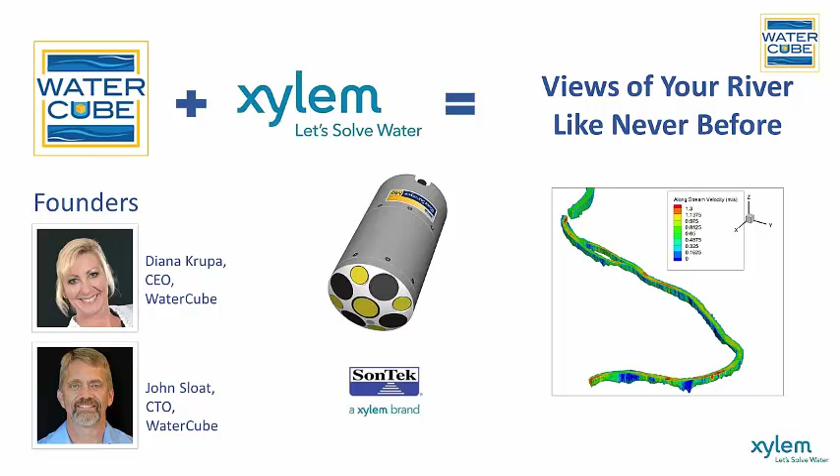And I thought I'd give a few introductory slides to just discuss what WaterCube is and why you would want to cube it. So WaterCube is a solution, really, to address the needs of the water resource industry and be able to provide a solution, a total workflow, which enables customers to have an aggregation of their data on the water using multiple instruments and utilizing a big data processing engine such that it is processing and analyzing vast amounts of river reservoir data, and then software on the back end to visualize and manage that data for comparative analysis, for validating and measuring your progress.

So this is something that we can do within days of data collection. No longer do you have to wait for a DEM to be created or to utilize MATLAB or ArcGIS or separate software applications. You can now process very quickly, create spatial views, and have your data within days.

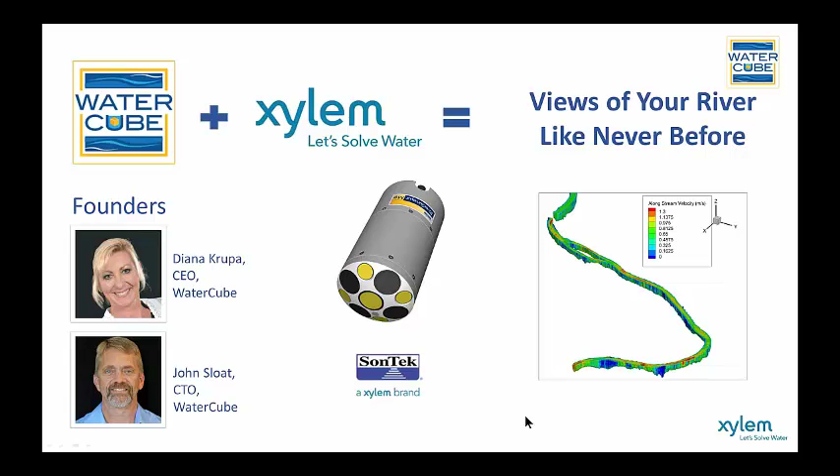And the applications are really quite vast. Today we're going to be focusing on velocity indexing and site selection and calibration with Art Smith. But we're also going to talk a little bit when we start looking at this data about the power of spatial data and what it can truly provide for certain applications, whether you're looking at stream power for hydropower applications, flow and quality monitoring, site selection, river restoration, even doing bathymetric studies in reservoirs and sediment buildup studies, habitat studies as well for your environment.

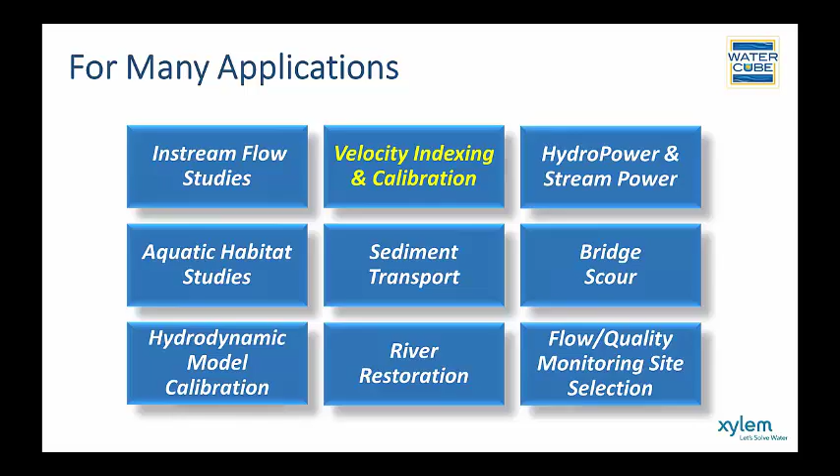And another thing that's quite unique with our Cubeit software is the ability to do model calibration for your numeric and hydrodynamic models and compare real spatial data to your numerical models and to calibrate them more effectively.

So technology has come quite a long way, and that's what's really enabled us to bring this solution to the market. So, in the 90s, there was the ability to get out on water and collect information through a single frequency Doppler ADCP. And then into the 2000s, the invention of a multi-platform integrated ADCP was a vast improvement and enabled everything to be within one system, giving you coordinate systems and the information you needed.

And today, we're able to put multiple systems on the water. Not just one, but multiple can be used, and then we can aggregate this from multiple ADCPs, as many as you wish to put out there, and collect that, pull it together, and process it very rapidly so that you can visualize your river like never before.

So with all this technology, of course, there are still challenges. And so for looking at how you want to solve the objective at hand, there is a lot of technology that still has to come together, be applied to the water, and a methodology for the data collection. And so Nick will walk us through that in a moment on how they did this particular survey on the River Severn.

But there still are some challenges with getting the data, making sure it is quality data, and processing that with multiple instruments, inclusive potentially of LiDAR. And then there's no immediate way to see those results and visualize the river to understand the impact that you may have. And so the back end of our workflow is really giving you that ability to visualize and see your river and what is changing and actually what's impacting your river over time.

So this is where WaterCube actually comes in. We provide a complete workflow for advanced data collection utilizing the latest acquisition technology on the market, aggregating that together to produce very quick results, and then taking that into state-of-the-art visualization software, our Cubeit software, for managing and visualizing that data. And so I'm going to hand it over to Nick so that he can talk about how they cubed the River Severn. Thanks, Diana.

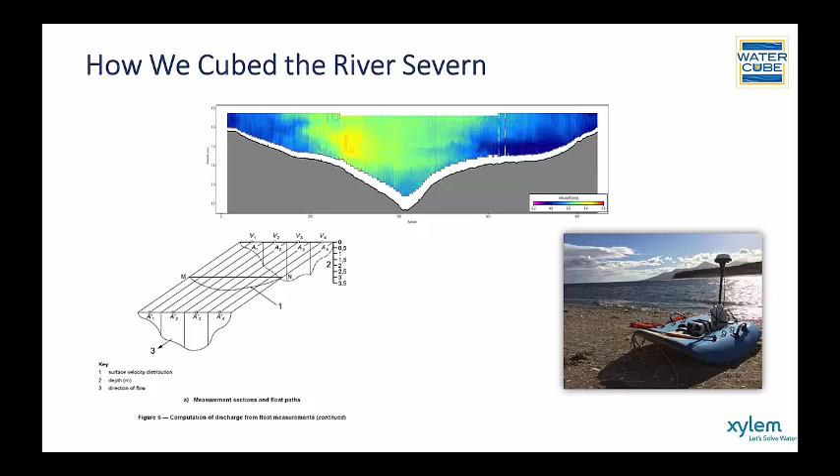And if we look at the next slide, more detail how we put it all together. So if you could go to the next one. Do you have it up now?

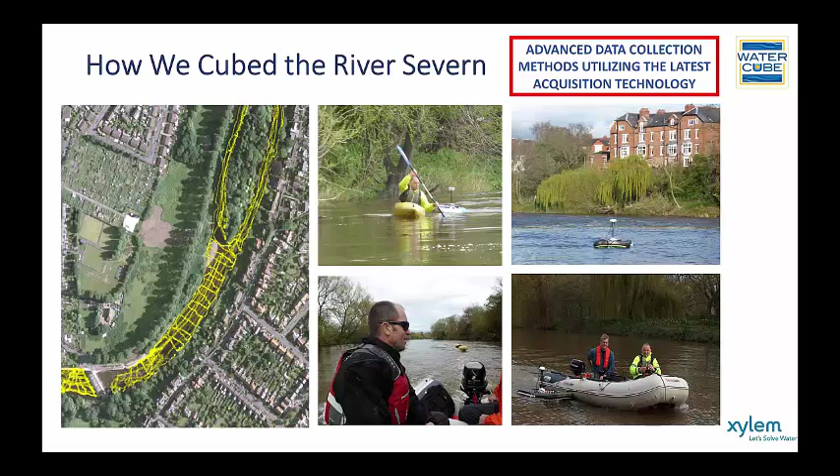There we go. So on the left is the depth sounding from each of the 5. In other cases, we've used a rope from shore to shore above the weir to make it as safe as we could. We've used the power boat as well. And we've also used remote control boats. So 3 of us out here at the same time collecting data simultaneously and then bring them back together.

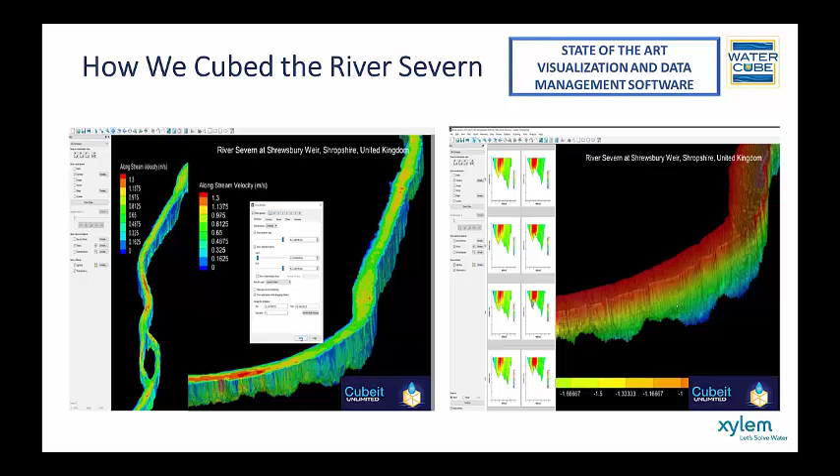So WaterCube, what we did then is we took all of this data that we collected within 4 to 5 hours one day, and we did it on 2 separate events, and we brought it into WaterCube. And this is a picture here of not only the depth but the velocity in 3D as we put it together. So this is bringing all that data back from the M9s and putting it into one package so you can visualize it. And so now I'm going to hand over to Professor Art Schmidt of the University of Illinois, who's been helping out with WaterCube, and he's going to tell you more about what we can see with this data that we went out and collected. Over to you, Art.

Thank you, Nick. My name is Art Schmidt. I'm, as Nick said, a professor at the University of Illinois, Urbana-Champaign, Illinois. And I have been working with river measurements, flow measurements, hydroacoustics for about 3 decades now. And a while back, talking with, in particular, John Sloat from WaterCube, he mentioned some of what they're doing, and I got rather excited about some of the possibilities.

And so today I'm going to show some things in WaterCube and some of the things that can be done with this ability now to visualize what's happening inside an entire reach of a river. So the figure I have up here now is inside the WaterCube software. And this one, we've coupled the along stream velocities.

The higher velocities are in red, lower velocities are in blue, for this entire 4-kilometer reach of the river near Shrewsbury. And then we also have LiDAR data coupled with this. So from the LiDAR data, you can see some of the features of the floodplain, the area around the river, the roads and so forth, the bridge here leading to the river.

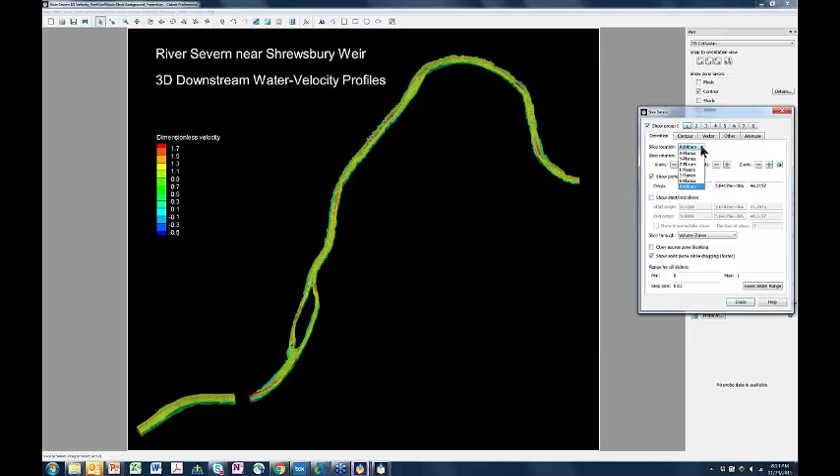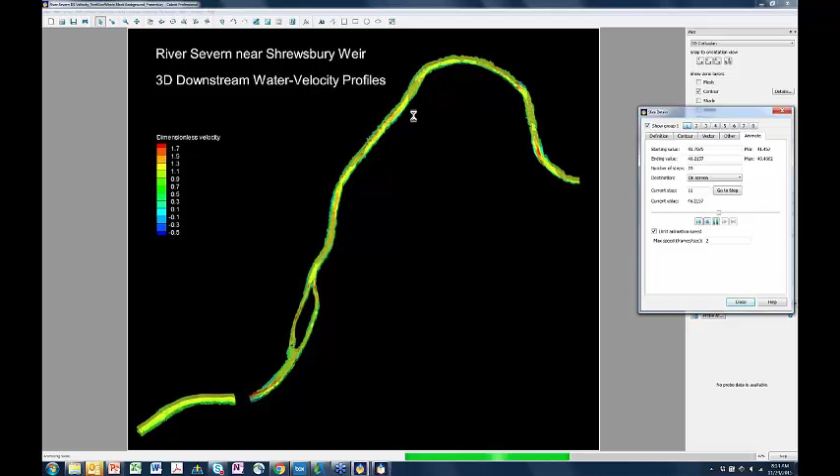I'm going to go to a horizontal plane here. And I will start with an animation. We will just start from a little bit below the stream bed and let the slices move up. And so you'll see it starts to fill in up here the deeper holes, but we're not to where there's water everywhere. Now we're getting the entire stream. And so we're looking at the slices as we move from the bottom up.

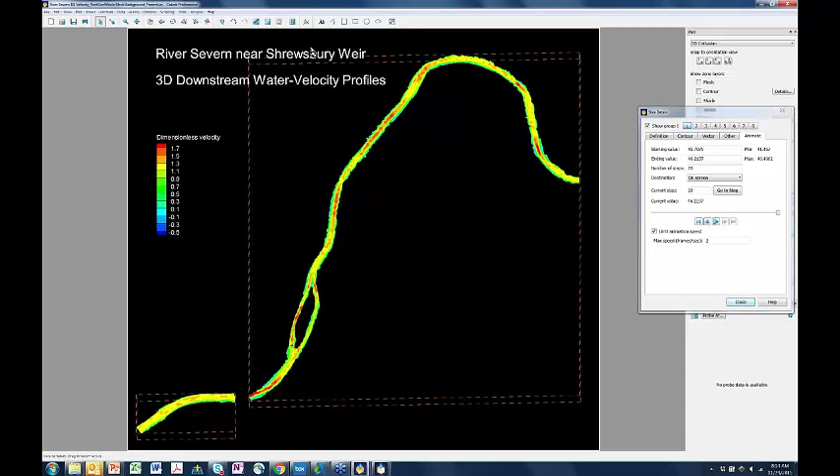To make it a little bit more plain, I will shut off the contour map here. Let me get rid of this bounding box, shut off the contour map, and go through our horizontal slices again. So what I want to illustrate here is the ability I can look at different parts, different levels, different vertical slices in my river.

So for example, if I'm interested in a fish habitat study, I might want to know what are the velocities some distance above the stream bed. Similar type of thing for scour, so it lets me look at this.

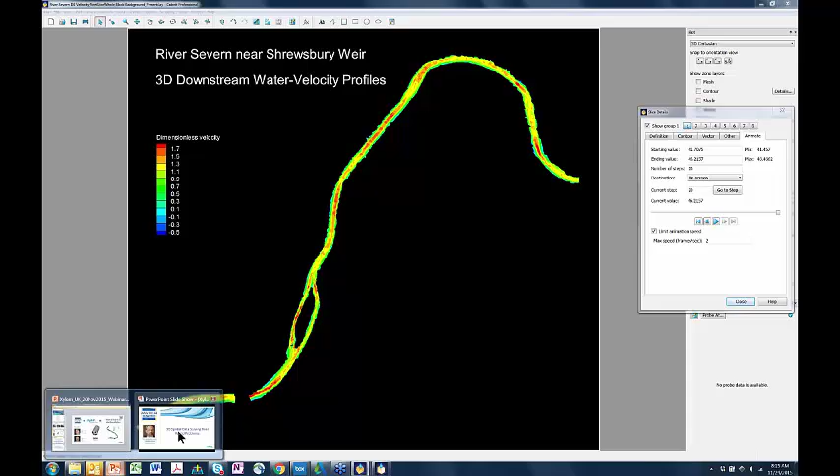What I'm going to do, though, for the most part today is talk about index velocity ratings, and I will use this as a case study as an example of what we could do with this. So we'll go back to the WaterCube software in a bit, but I want to give just a little bit of background for those who don't know index velocity ratings.

Index velocity ratings are widely used at places where we don't have a good stage discharge rating. So this could be somewhere where we have backwater from a reservoir downstream, or a larger river that's flooding, anything where we get backwater conditions. It can be someplace where we have variable gate settings that can control and affect the relation between stage and discharge. Tidal influences, even sometimes a lower gradient stream that's highly unsteady, we can need an index velocity rating.

So the basic idea is, instead of measuring the stage and estimating the discharge from the stage, we measure the stage, but we use a stage area relation determined by surveying the cross-section, and that will give us the area of the flow. We also put in an instrument that measures at some subsection of the flow, and we determine an index velocity rating, a relation between the mean velocity in the cross-section and the velocity we measure at this subsection of the stream. So then, by measuring an index velocity, we get a mean velocity in the cross-section.

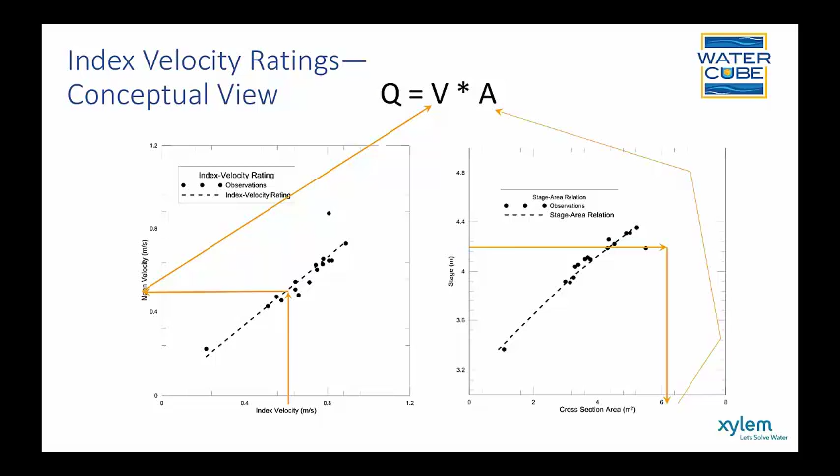So in velocity indexing, the fundamental assumption is that there's a very stable, well-defined relation between the velocity we're measuring in this index location and the mean velocity in the cross-section. If that holds, we get a good relation. If it doesn't hold, we're in trouble.

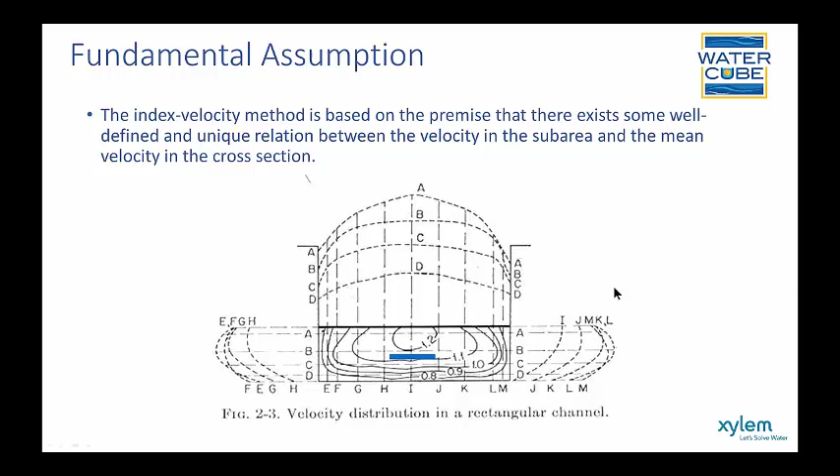But there's a lot of things that can affect this. Changes in flow conditions may change that velocity distribution. Changes in the geometry may do it. The distribution may change with time, things like scour, sediment buildup in the channel. Our velocity distribution can change with fluid conditions. Think of a tidal stream where I have a density gradient or a thermal gradient in the stream that can affect it. Or things like variable gate settings, and I'll show an example of this a little bit later.

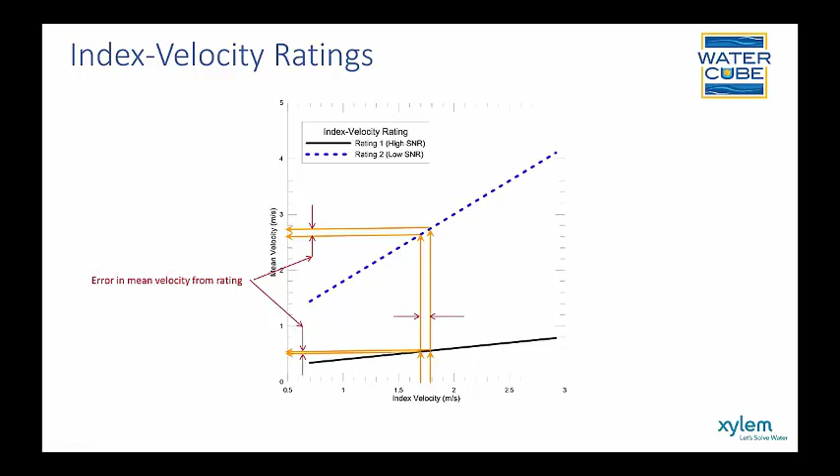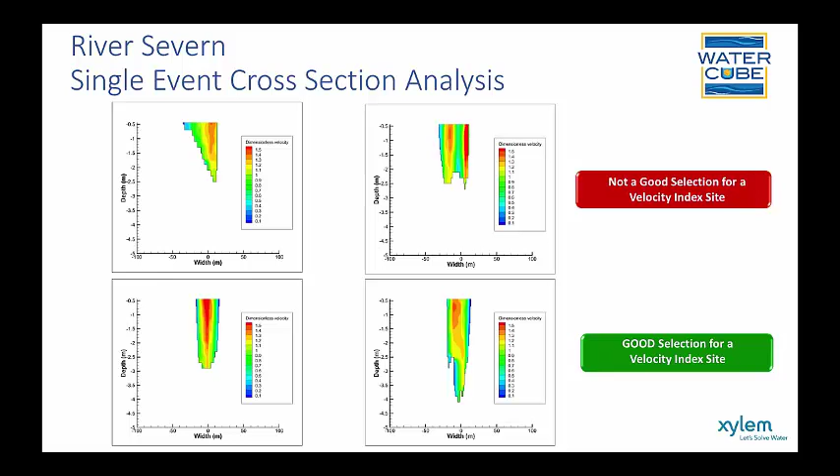And all this data here is from the WaterCube software, and this is from the Shrewsbury data that we collected. This is the Shrewsbury data you collected a while back, and then these are just some of the slices from the Shrewsbury site from WaterCube. This is one time down the river.

I'm now going to show results from a study done on the Snake River in Idaho. They had a velocity indexing site. In fact, I think it was near this first cross-section. And when they changed how they operated their 3 turbines, their index velocity rating went downhill very badly.

And so they went out, they did 4 measurements under 4 different conditions, different flow conditions, different seasons, different water elevations. And what I have here is 4 slices from the exact same site under those 4 different flow conditions. So you'll notice the very different dimensionless velocity patterns.

Clearly, as the flow conditions change, your center of maximum velocity is moving. So depending on where you're measuring, you're going to get a very dramatic change in that index velocity rating.

In contrast, from the same data, just a different location in the stream, we identified this site where you have a very consistent pattern of where the maximum velocity is, the lower velocities near the banks, and any real river will have some variability, but this site is going to tend to be very stable.

So if there's some concern about your site, doing multiple passes before you actually spend all the money to put the instrument in can be very valuable. So I want to show a little bit of this now in the Cubeit software. So what I have done here is I have zoomed in on that site where I said this would be a good one near Shrewsbury. And once again, I am going to pull up those slices.

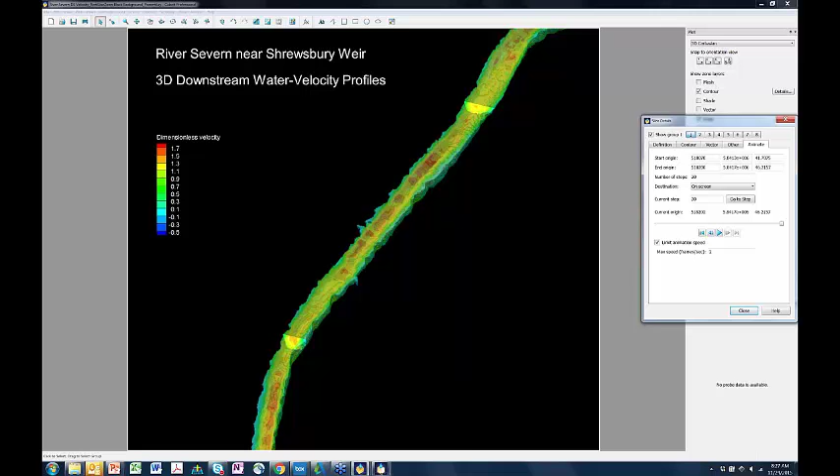So we can also, in the Cubeit software, these are all the dimensionless velocity slices from the upstream end all the way down the channel. So I just have all the slices pulled up side by side here.

And we can just start to look at these and look for what is going to be a good site, what might not be as good a site. Where are we getting that strong signal, more of the red? Where are we getting things that are well centered in the channel? You'll notice some of these are just sort of splotchy. It's not consistent as we move downstream. So for a very short area, we might have something good, but then we go a few meters downstream and

it started to change. So Art, just to confirm here, each of these vertical columns are discharge and measurements made on 4 separate events, 4 separate days. But no, I'm sorry. This is Shrewsbury. So this is one event. You're reading this just like a book. So this is a cross section. This is the next slice downstream, the next slice downstream, and so forth.

And in the software, you can pick what sort of spacing you want. I believe these were set up every 1 meter, but you can say every 1, every 5, every 10. And from all those data collected, the run of river and the transect type measurements merged together, the software puts together all these cross sections. So I'll scroll down a little further here.

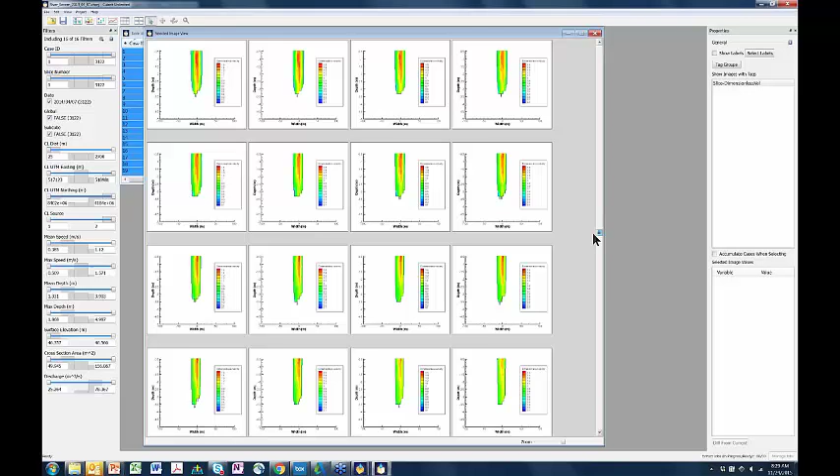And so my hydrologist can continue to look until we see some of those sites where this is now looking like a good velocity. I think these are some of the sites I pulled up. You can see I'm now a distance of about 1,160 meters downstream from my weir. I've got slice numbers. I have UTM coordinates. A mean speed here of 0.59, a maximum of about 0.98, a mean depth of about 2.5 meters with a maximum of 3.5.

So we have the data here. I can pick different sites and look and see what might be good. And so this is just illustrating how your hydrologist has more information to apply their expertise to where would be a good site for this. I'm going to now switch to the Snake River site.

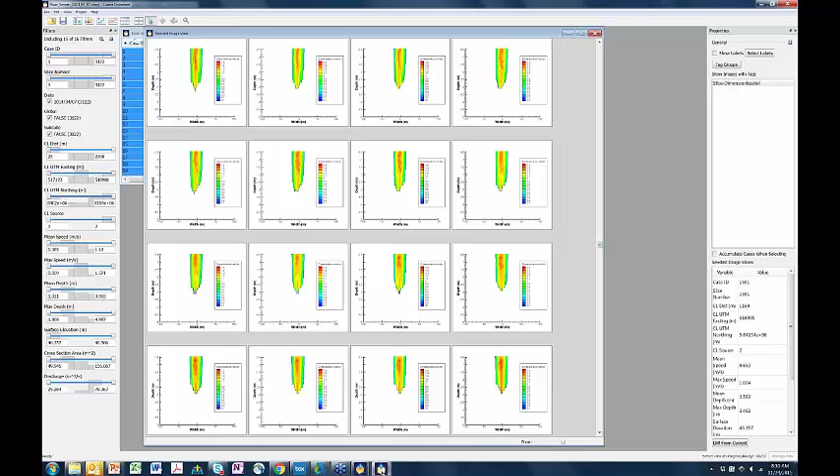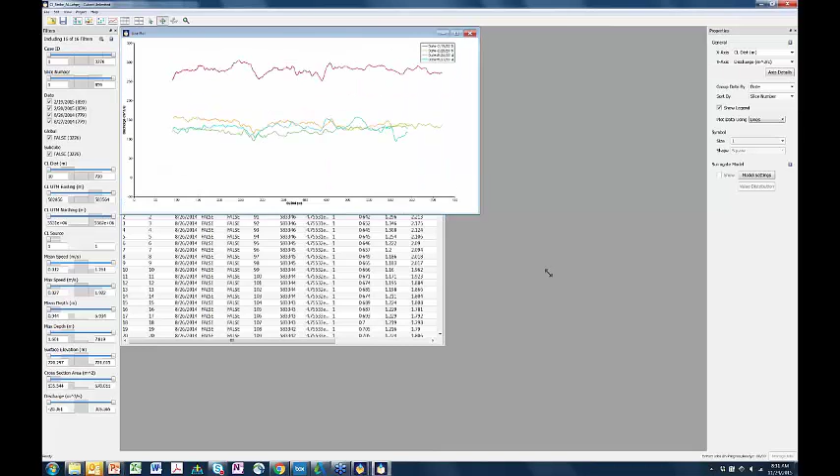And when we pull this up, you'll notice we have a table. We have data for every slice, so I can look at it in tabular form or a slice at a time. And I pulled this figure up at the top. What I'm showing here is the centerline distance and then the discharge determined from all these measurements as we move along the stream. And so you'll notice, again, 4 different dates, 2 in August of 2014, 1 in February 2014, 1 in February 2015, and very different flow conditions. We had 2 turbines running. These we had just 1 turbine running.

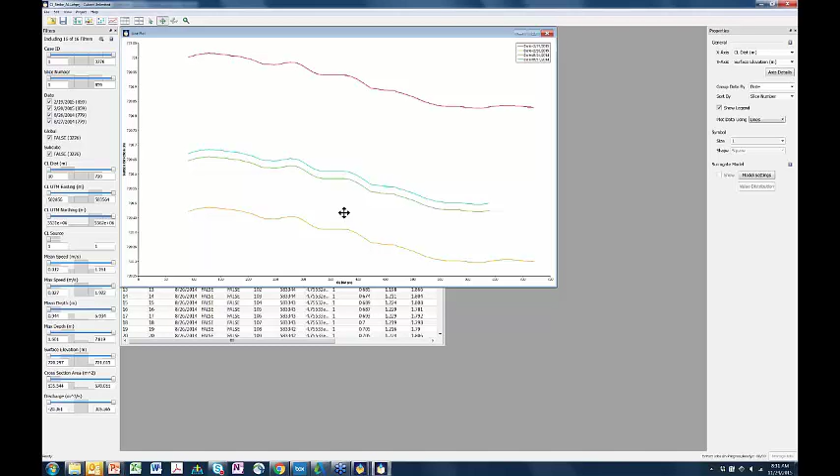I can also change my y-axis to the water surface elevation along the reach. So we're seeing here's our water surface slope, but you'll also notice that even the 3 at the same flow condition, we had a change in the water level. So we have a seasonal difference, August to February, different water elevations and different flows. I can then pull up this matrix view, and I want to make my columns, instead of slice number, the date.

So what I've just pulled up here, this is what you were thinking earlier, Nick: each column here is a different date. Each row is the same slice, the same cross-section location. So now I can look at my entire river. Here's some of the ones I showed before where you can see the velocity moving from the center out to the side. By the way, I should have pulled this up first. Let me give you an overview of where we're at.

So I'm going to move this a little bit. This is the LiDAR and the dimensionless velocities at the site. We have the dam and reservoir up here. Here's a spillway, which is not being used. In fact, it's very rarely used. Here's a powerhouse with 3 turbines. And then in the LiDAR, you can see a road coming down and then a bridge here. And near where this bridge is where the old velocity index site was.

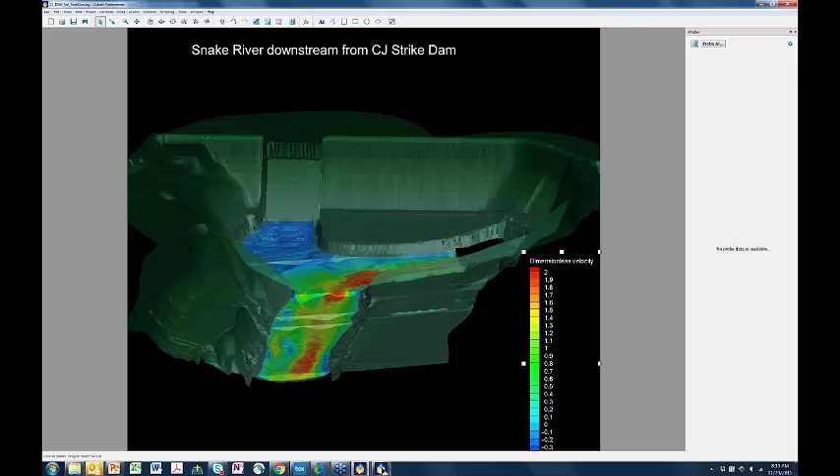And I showed a few slices, but what happens depending on which of the 3 turbines is being run, near the bridge, the maximum velocity moves from one bank to the other. And so that's why they were having the problems. So by looking at these data, again, you can see here the maximum velocity is near the right downstream bank. A different turbine running, it's more in the center.

As I scroll further downstream, and let me go a little bit here, we're getting to some of these points where no matter what the flow condition, we're getting very similar velocity distributions. And so that's telling me we've got much better sites.

Some of these in here are where I thought might be a very good site for velocity and flow conditions, different seasons, different turbines running, different combinations of turbines. We're getting a very consistent pattern over time. So this was a site where doing multiple runs helps to identify a better site for velocity indexing.

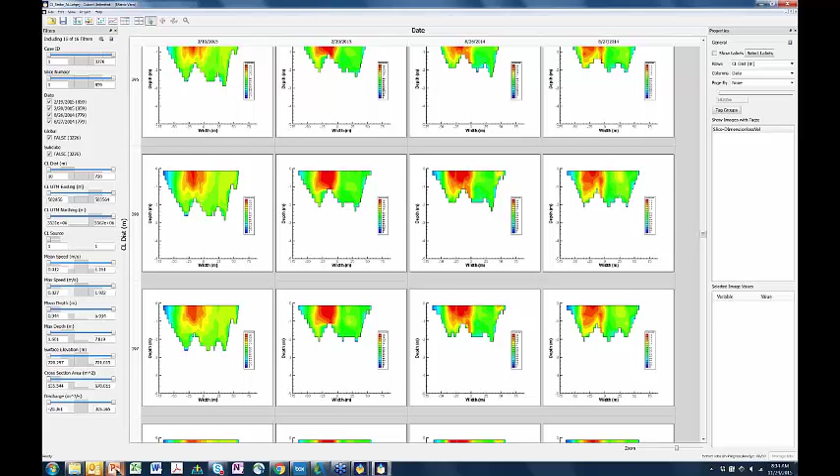So with that, that's pretty much what I had on velocity indexing and how this software gives your scientists, your hydrologists and engineers the insight for this application. There are a lot of other applications that can be done with this, but beyond the scope of today's topics.